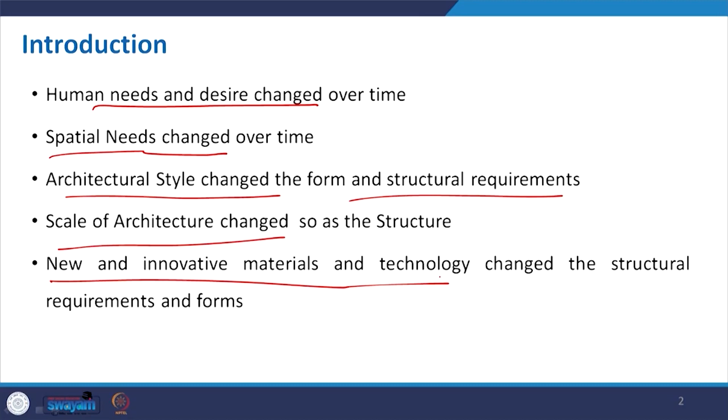Most importantly, new and innovative materials and technologies changed the entire scenario. From time to time we got good materials with good strength, which can easily be placed instead of using traditional brick or other building materials, giving more strength as well as creating the desirable interior space we normally look for to maximize it.

So let us move to the history, and with the time constraint it is not possible to give all the examples, but here I try to summarize and take some very prominent examples. I would also request you to do this search and compile more buildings in each of the phases, which depict the architectural style as well as the structure used in it.

So let us move on. This is the overall timeline, and some sources add other things like Crete architecture. These are the basic timeline at a world level, starting from prehistoric, then Egyptian architecture, and we know the pyramid and other beautiful pieces of architecture from that time.

Then the classical period is very important, where we have Greek, and after that Roman architecture, starting from Parthenon to Pantheon. The style is more or less the same, but the formation and requirement changed a bit. Then Byzantine, then Romanesque, and then Gothic. Gothic architecture is very famous for the ornamentation of structures and the use of pointed arches. We will also get the detail of that.

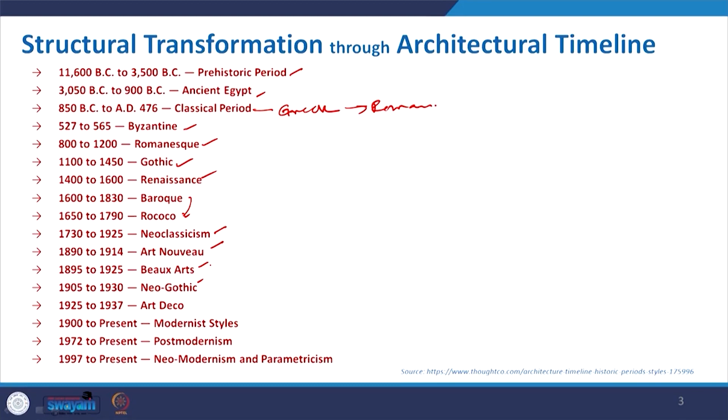During 1920 and that particular phase, the system changed, and modernism started at that time. In modern style, we go for minimalistic structure, made possible by the invention of steel and other things. After the industrial revolution, structural requirements and their use in building changed the scenario. Then postmodernism, we saw some beautiful buildings at that time, including the Sydney Opera House and similar structures.

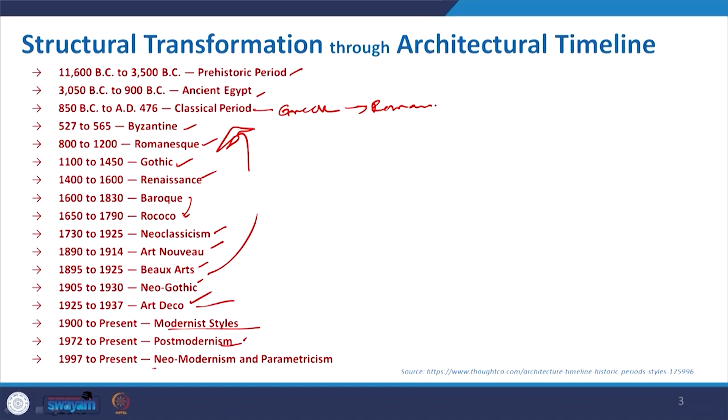And then neo modernism and parametric architecture, which is nowadays in practice - from modern to postmodern and parametric architecture, all these are in practice. Even some buildings look back to the earlier classical order in architecture. But these are the architectural forms; our focus will not really discuss contemporary architecture and their transition, but will also try to focus on the structural changes and how they have changed.

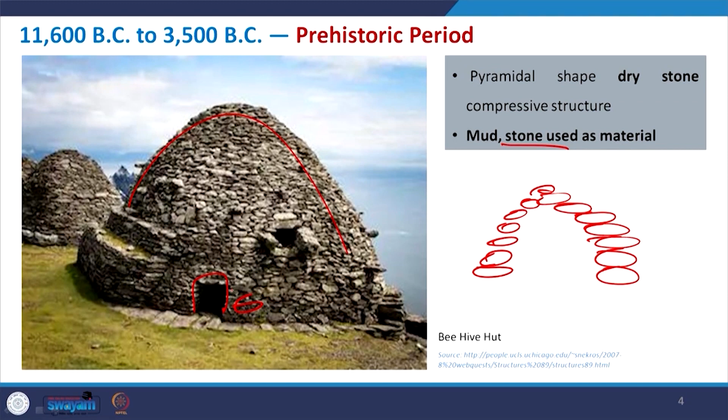Here sometimes mud was also used, or in most cases stone was used, with a small opening to act as a door. This is really interesting, and it is basically a compressive domical structure, where stone is stacked one after another to form it.

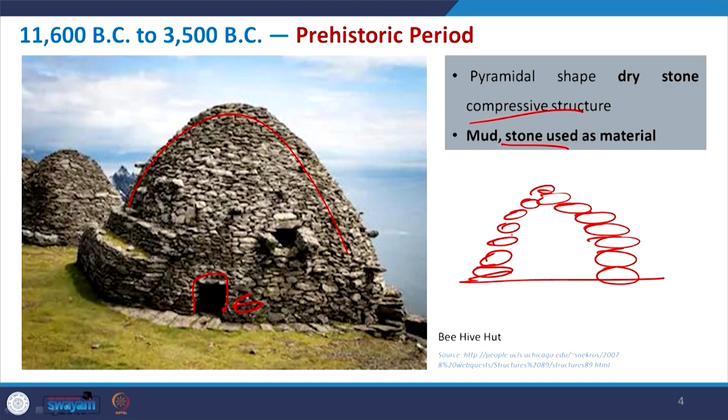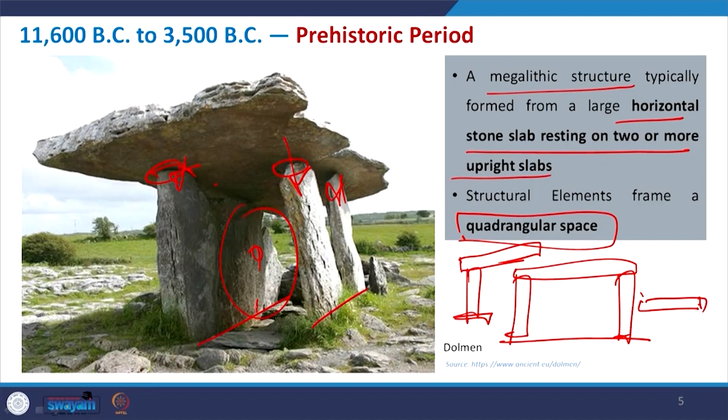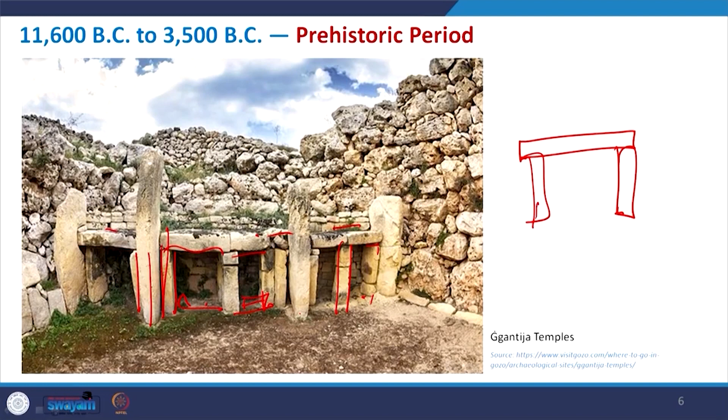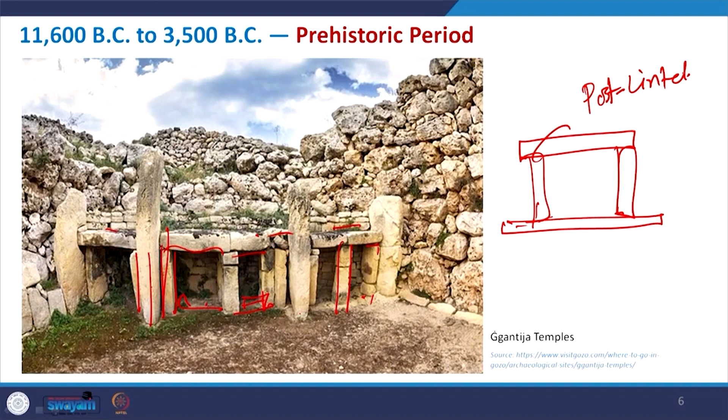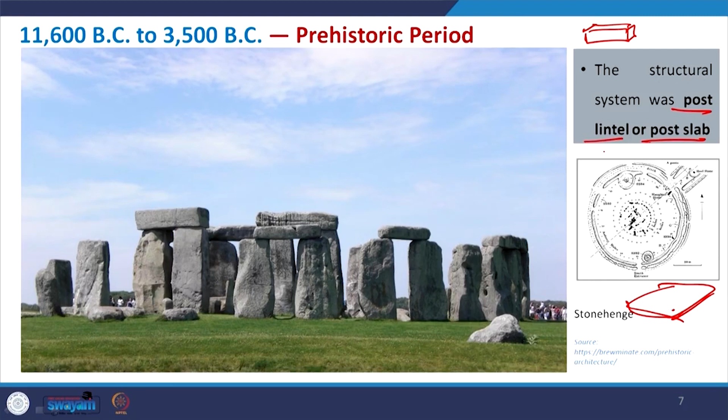So, depending on the span or the area of the stone we used, we call it a slab when it has a considerable area, length and width, and when it is just like a piece of beam, then we go for this post lintel structure. So, this is again one example from the prehistoric period, and now we move on to Egypt.

In Egypt again they created beautiful architecture with symmetry and stability. So, the pyramid is considered to be one of the most stable structures because of its larger base, and as it goes up it merges to a point. So, for the wind condition and other lateral forces, this kind of shape is very useful.

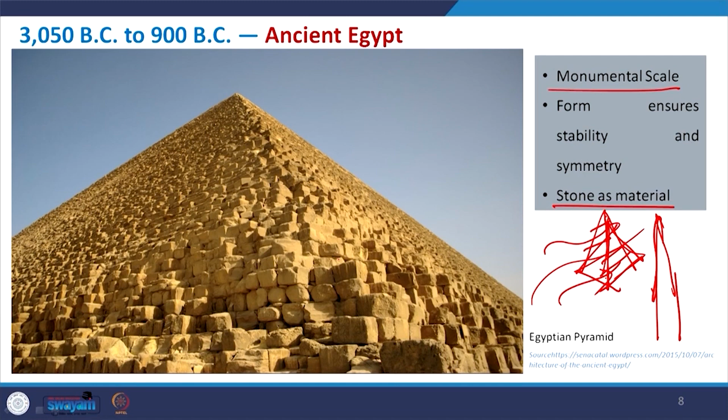That is why now also in modern buildings, high rise buildings, as we go up we give a conical or pyramidal shape at the top in order to resist against the lateral wind load. But again it is a monumental scale. So, structure is very much used, and stone as material. Using stone as a material gives good strength, and altogether one after another it will also give a megalithic structure, so that it was stable.

Not only the pyramid, even in that period in Egypt they also constructed other structures where they used the timber beam, and this is monolithic stone masonry. So, you can see this particular wall. A single piece of stone they have used there. Then the columns made by single rock. So, that is another important issue.

So, from the single rock they cut, and they give some kind of ornamentation to it, they paint those structures. In Egypt the Egyptian painting on the walls and the columns is famous. And overall the concept remains the same in this era also. This is post lintel or post slab, where your horizontal slab is resting on the vertical columns.

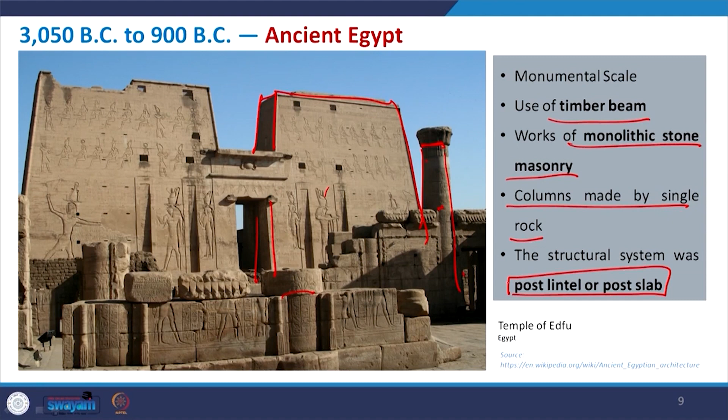Now, coming to the classical period, we start with Greek architecture, and this is the example of the Parthenon, which in many cases we repeat because of its multiple characteristics. Here again, as we already discussed about this Parthenon, basically a structural dictation is there to create this form.

So, basically in a rectangular form multiple columns are placed and then they are connected with a lintel or beam, and what it gives is the trabeated system, where you have this horizontal beam on this column, and then you can create these triangular members to support it to create the roof system.

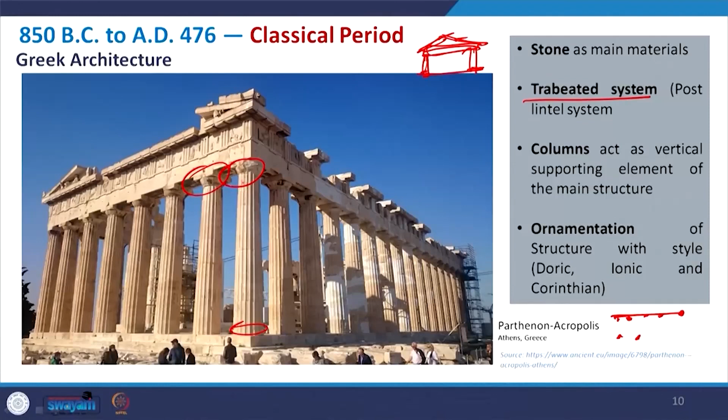And the most important thing here, it is not a simple post beam structure or a rough finish. Enough decoration has been made, and the Doric architectural style has been used in this structure. So, you can see the capital of these columns, and we already discussed in the last lecture how this ornamentation was done in this particular period. Even in the lintel or beam, ornamentation has been done.

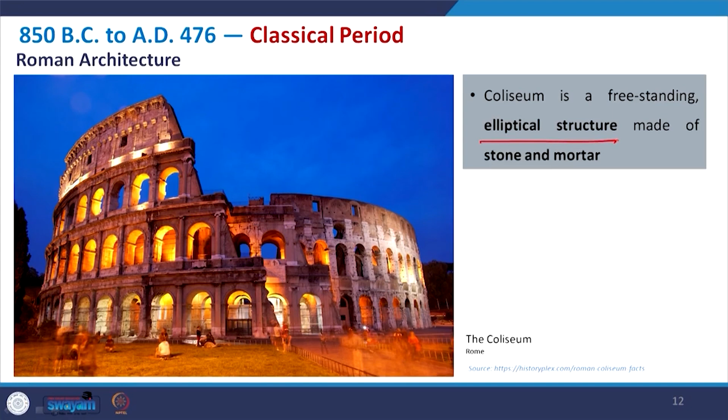Now, this is another example from the Roman architecture, the Coliseum. So, here this beautiful arena is made with an elliptical structure, and here stone and mortar are used, even in this case also.

Now, come to the Byzantine, where stone is being replaced with brick, and then the dome roof, like even in the Pantheon in Rome we have seen that. So, it is being used, and along with that you can see the use of arches for the window, even for the structure of this huge roof.

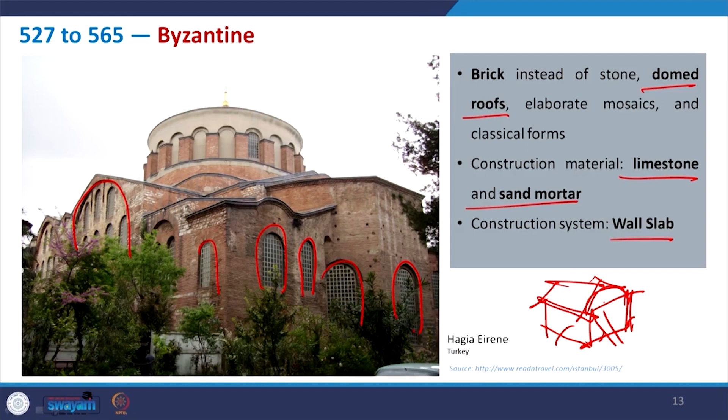So, again the pitch roof has come into the picture, and the construction material is basically limestone and sand mortar, and the construction system is wall slab. So, instead of column, it is basically a load bearing structure that is being constructed. The wall is formed, which gives the envelope, and on top of it either a pitch roof or a dome roof. So, there is a transformation that we can see. Earlier it was a post lintel kind of structure where you get more void through the structural arrangement itself, but here we go for wall and slab.

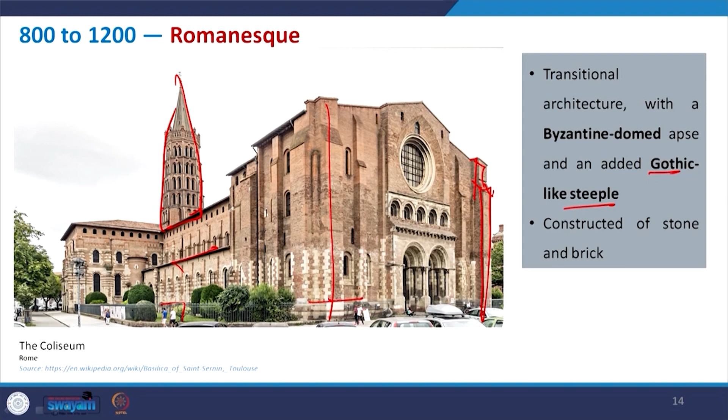Now, the Romanesque is again the addition to the Byzantine dome, that is the Gothic-like steeple. So, this structure is added to it, and if you see, the scale has a little change; the scale is a little reduced here, and along with that they also create some additional support to this. So, basically again here stone and brick are used, and again it is a load bearing structure that was constructed during this phase.

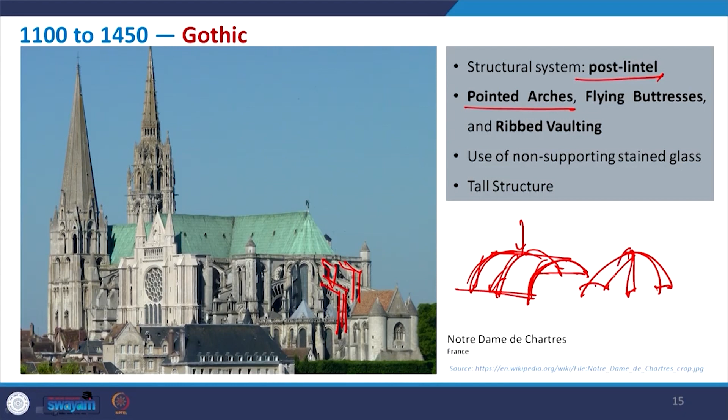So, from the interior you can see all these buildings, and this is the Notre Dame in France, where we can see this pitch roof along with the buttress, and inside you also get some cylindrical form and the use of vault. So, gradually, in order to support the tall structure and also create more interior space, to make the space column free, to have the assembly in a beautiful way.

So, development of this kind of compressive structure, where ribbed vault and lateral resistance provided by flying buttress, these are some of the additions. So, shifting from simple post lintel to adding all this is one of the features of this period.

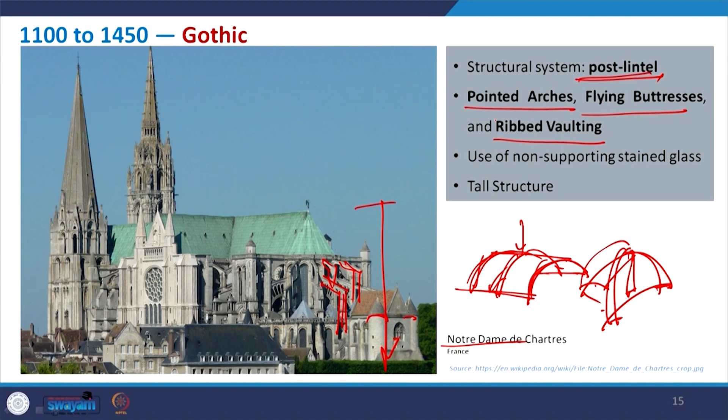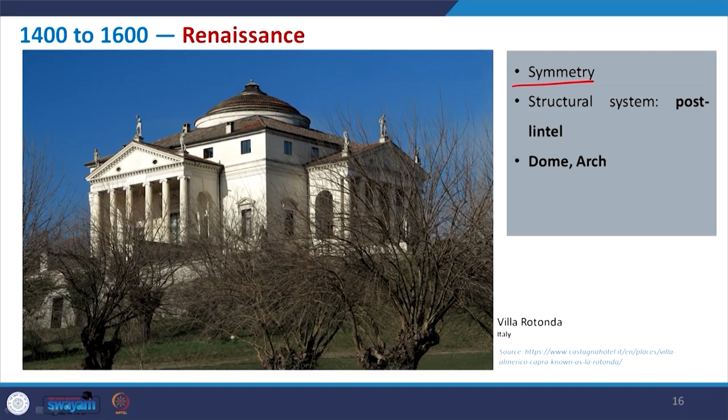Come to the Renaissance period. Here symmetry played a role, and you can see those styles; here also the ionic column is used, and it is similar to the Roman, but again it is post lintel and post slab structure. Along with that, the central dome and arches are used.

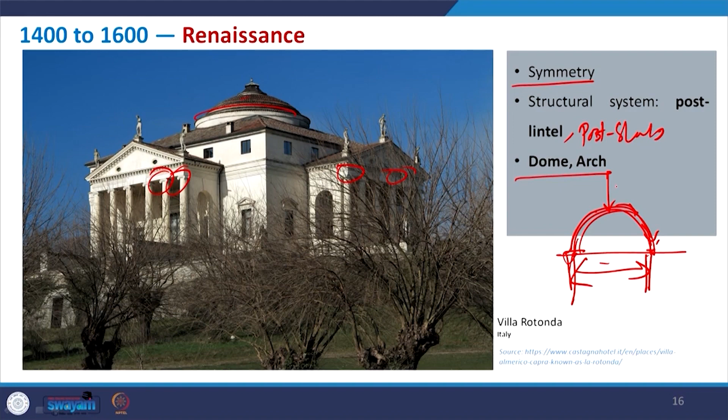So, for the arch, as we discussed regarding the property of the arch, with this symmetrical arrangement it will easily transfer the load to the support. So, we can create some span with this kind of structure. The same is true with the dome, and if you take an example from India, then Gol Gumbaz in Bijapur also has a huge dome. So, that is being practiced to create this structure.

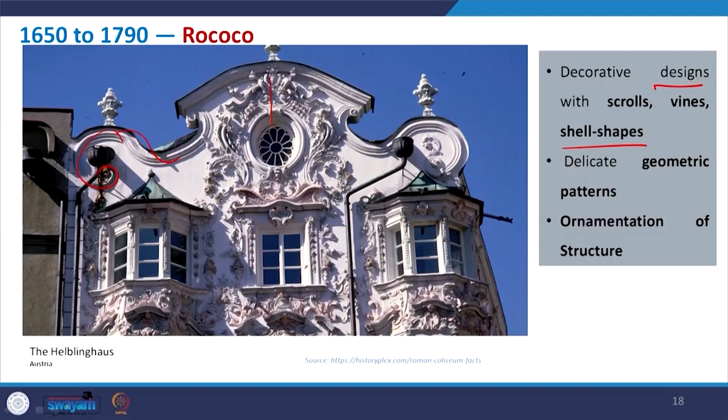Then Rococo is again further decorative design, and you can see those moldings. So, there also the delicate geometric patterns being followed, some involute and symmetry that has been made there, and basically in this case again the structure is being followed the same as the previous one, where you get this particular Baroque architecture or Renaissance architecture.

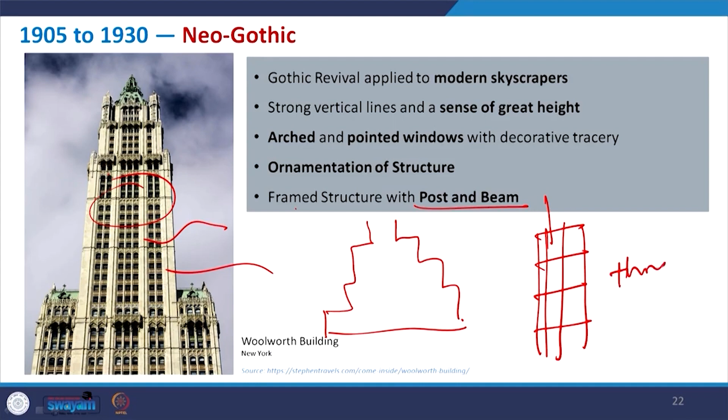Now, come to Neo Gothic, it is basically a transition to the modern skyscraper, but adding some features of the Gothic. So, it is again a revival period where that kind of ornamentation is made, but now in this case we have this frame structure with post and beam. So, frame structure comes into point, and when we go for the multiple floor high rise structure, due to that lateral pressure and all, it has this particular step cut architecture, where when you go up, the cross section of the building is reduced to resist the wind load. So, this is some advancement being made, where the scale has been reduced to the human scale. Okay, the space is optimized, but ornamentation is still on in this particular period.

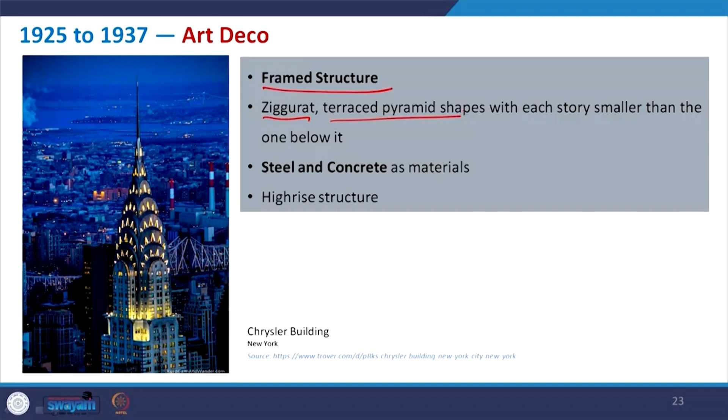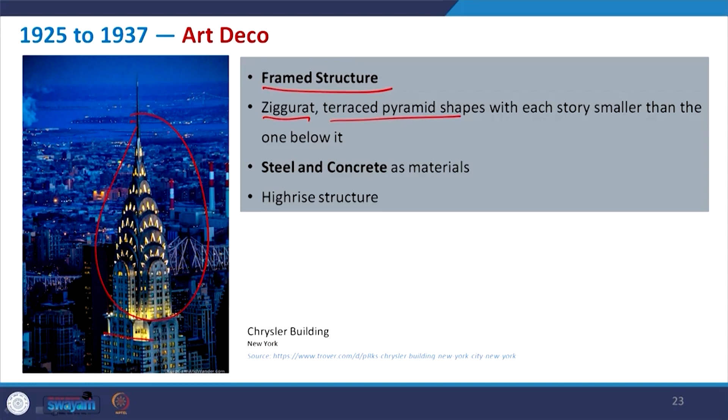Now, Art Deco movement, the frame structure is already being introduced. So, ziggurat or terrace pyramid shape structures being made in this case, and steel and concrete used as material to give the form, and it is basically the high rise structure. That was the need to create some high rise office buildings or residential buildings, hotel buildings, and this is one example of that, where overall it is giving a nice aesthetic look, but from the structural point of view it has moved from a typical structure to the frame structure at this moment.

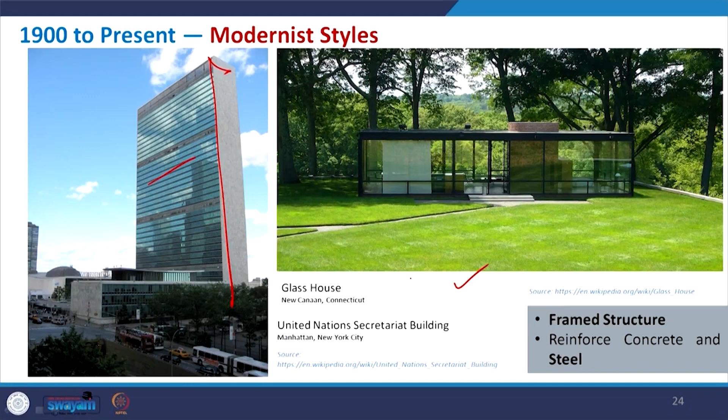Now, come to the modern style. So, here it is the time where architects and designers prefer the minimalistic form with the structural application. So, this is one example, the United Nations Secretariat buildings, very simple straightforward building, frame structure, use of steel and concrete is very predominant and very simplistic, no such decoration, and so it is true for the glass house. Again it is the use of steel and then use of glass. So, basically in the modern style decoration and ornamentation was not given prominence, rather the space creation and the use of the structure to reduce the thickness of the wall to carry the load being given importance. So, that is why since then we create multi-story buildings with this.

And postmodernism, it is out of the frame structure, then the designers tried the shell structure to reduce the number of columns required, and it is created with reinforced concrete, so that it can create the interior space, large span structure, and we have seen that in many indoor stadiums, even in the example of your Lotus Temple that is being used.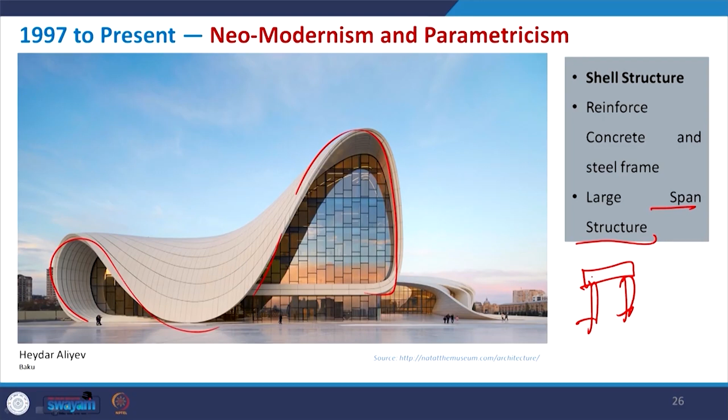So, large span structures are being made, and there are many examples. So, this is one of them. There are examples of different high rise buildings, many buildings designed by Zaha Hadid. So, this is the overall transition from a simple post and beam or post and lintel structure to this kind of form. This is a long journey, and due to the invention of steel after the industrial revolution, this has been so popular. We have even seen the Eiffel Tower at that time. So, that has a change.

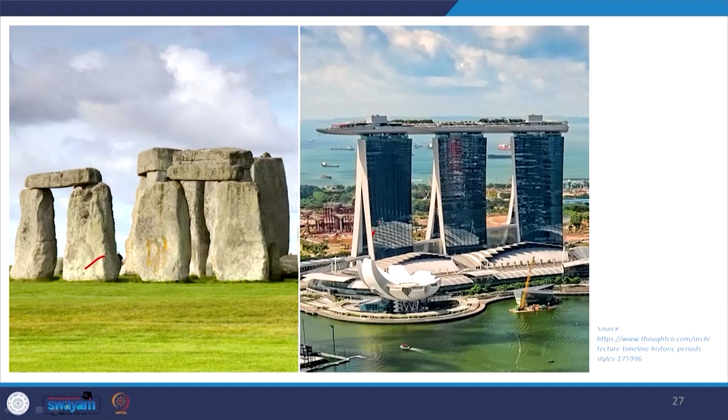So, you can just compare these two images. This is one example from Singapore, and this is the old Dolmen kind of thing. So, the basic idea remains the same, but the transformation, if you compare the thickness, is a huge difference. So, the idea and concept are in practice. From history we learned so many things that we use, but with some modification in the structural arrangement. And so, basically we have discussed all.

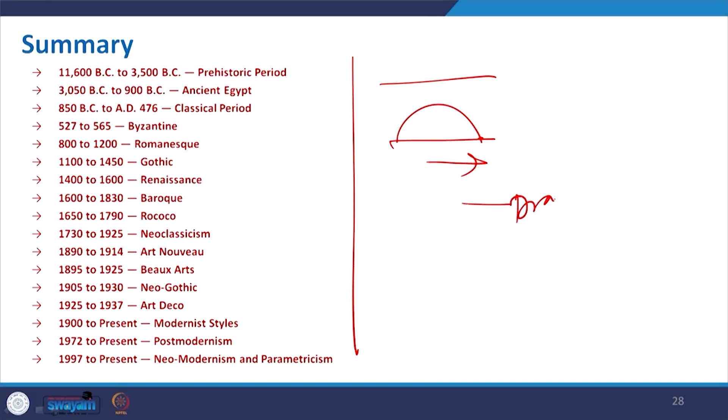So, during this phase also in the Indian context we have seen the Indus Valley civilization, where there are also examples of some of that structure, like the Great Bath and all. Later on we move to Buddhist architecture, we get the domical structure in Sanchi and then also the rock cut architecture to create those stupas, and then we have also seen the Dravidian temple in that era where again the form of a mountain or some pyramidical form of the temple was made at that time.

And then slowly we move to the other phase where we have seen Islamic architecture like the Taj Mahal and other things, where it is a beautiful example of the structure, the symmetry and also the ornamentation. So, those kinds of structures were made; even in Fatehpur Sikri we have seen different uses of brackets and their ornamentation. And then later on, in the phase of the British era or colonial era, we have seen the use of different columns, and they created some buildings following the old orders like Doric, Corinthian and all.

And later on, after independence, we also go for the global movement. So, during Art Deco and Bauhaus, there are different buildings being made and we followed. So, the history of Indian architecture is also very rich. We have seen the transformation from the structural point of view and the overall scale, but here we have just focused on the overall scenery of the world.

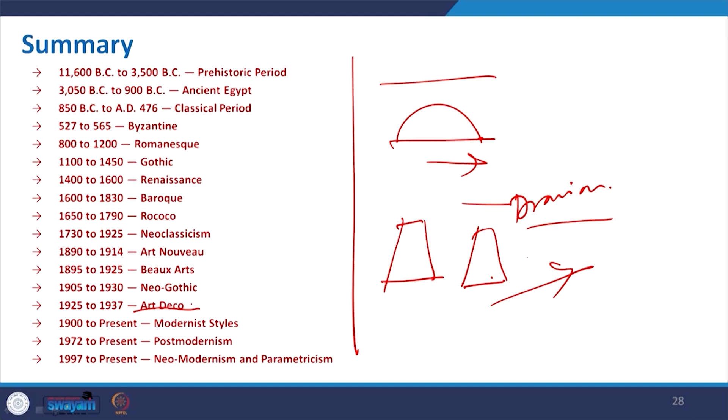And we discussed some of the changes, from basic structure, then ornamentation, then again in the modern era sticking to the very minimalistic form, going for more space creation, and then in the modern we again create very dynamic structures, which is possible because day by day we are getting more materials that can replace the existing ones. We are able to reduce the thickness of the wall, we can go higher and higher, and we are breaking the record of creating tall structures. So, that is only possible with this transition.

And again some of the buildings followed traditional classical architecture as a decoration, not from a structural point of view. So, overall architecture and structure balanced each other, and with invention we keep on doing new practices, and we move from one phase to another. So, I hope this will really help you to get a look at the transformation, but again I have taken very few examples and there are many. So, I suggest you go through the links I have provided in each slide, so that you can get more information about those buildings and search similar kinds of buildings. That will help us to understand this transformation.

So, with that I conclude this particular lecture, and these are the reading materials; some references are given as books. So, you can go through that, and next we will discuss the different factors that affect the structural form.